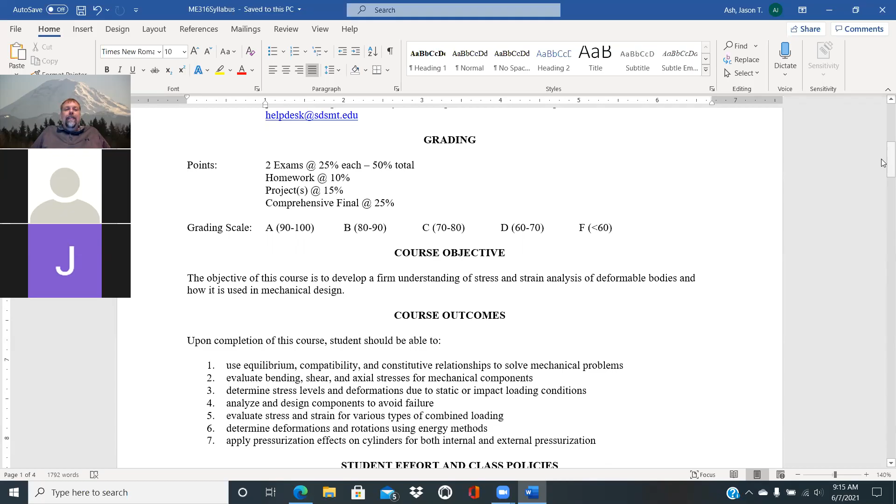And we have the whole list of course outcomes looking at applying equilibrium, compatibility, and constitutive relationships to solve our mechanics type problems. We'll evaluate bending, shear, and axial stress.

Looking at static or impact loading conditions, we might get to that. That shows up in the discussion on energy methods. And so we might have some time to look at that. Looking at failure criteria for that 4th item.

And there's a couple alternatives. We'll probably get into that more as we get to our lecture notes, but there's a couple ways to tackle that concept.

Evaluate stress and strain for various types of loading. Determine deformations and rotations using energy methods. And we'll also look at, in addition, the internal pressure vessels and the combined state of stress caused by internal pressure vessels.

What I found last summer when I was putting the syllabus together is that we cover quite a bit of material in a short time frame. And so in terms of expectations, think about for every 1 hour class period, it's expected that you spend between 2 and 3 hours in reading and solving the homework problems.

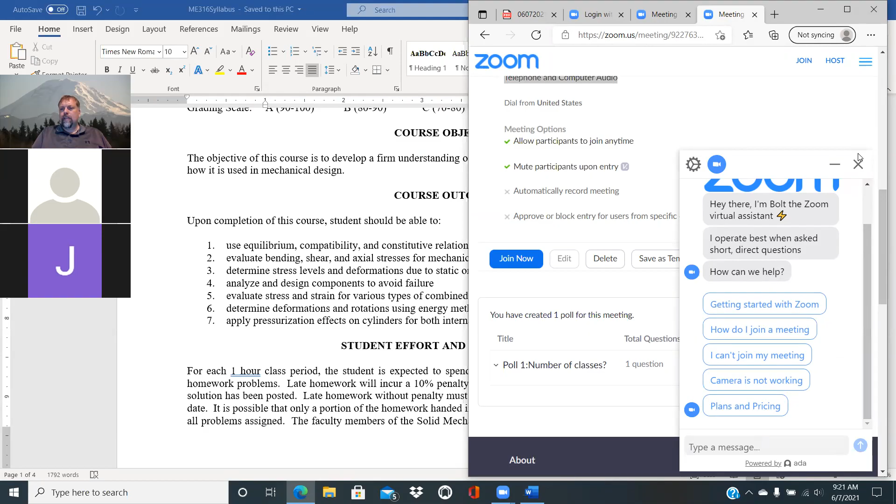I'm not sure if that came up as I was anticipating. I hit the poll button. Did you happen to see that come through? No, I didn't see a thing come through. Okay, no worries. I know how to do the polls in D2L, so I'll just send that and you'll get an email.

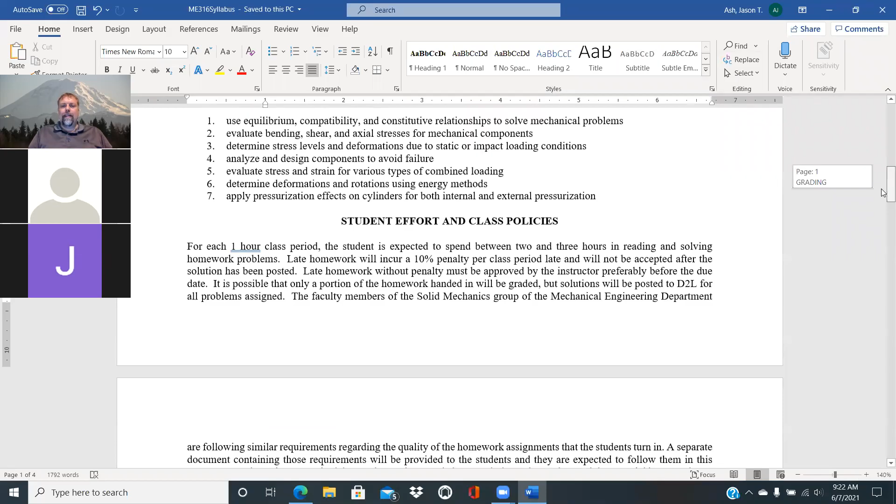We only have probably a fraction of the students on here today, so we'll be able to do that here after class. But I'll just kind of get an idea then from that anonymous poll how many classes each of you are in. And we'll do that through D2L. That'll work out well.

Then there's just all the other stuff on the student effort. For my classes, I have a 10% penalty for each class period that homework is late.

But as I mentioned before, we cover a lot of material here during the summertime, so I would definitely recommend just keeping up with homework and not getting behind, because it would be very difficult to catch up.

And likewise, this will all be done through D2L, and I make the deadlines due at 11:59 p.m. so that you have time in the evening to finish that up if needed.

I said that in the email too, that I normally would make homework due on Fridays at midnight during a normal semester, but last summer we had some students that requested that be moved to Saturday by 11:59 p.m. since they were working all week, and that was totally fine with me. That didn't make any difference.

So keep me posted on that, just with the summer situation, if we're maybe needing to shift the deadline for the class as a whole.

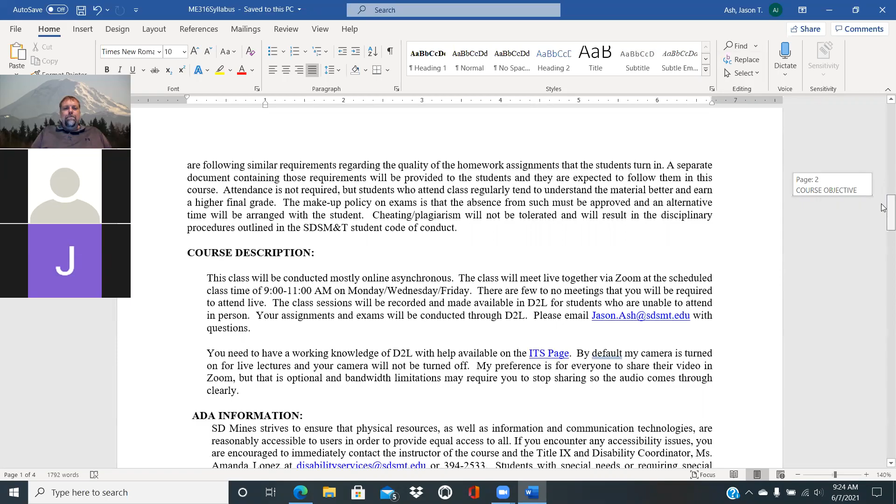Everything that we'll do through Zoom, online, through D2L, again, we're just essentially using the honor system to maintain our academic integrity. I think what I found since we had to switch over to online in March of 2020 is that students have been doing really good with that. I really haven't seen any concerns come up with that at all.

The exams, those are take home as well. And I just have you sign a statement saying you only use the allowed resources within our D2L pages, your textbooks and things like that, and that you're just doing the exams by yourself. So I've been really satisfied with the students and their academic integrity throughout this whole situation.

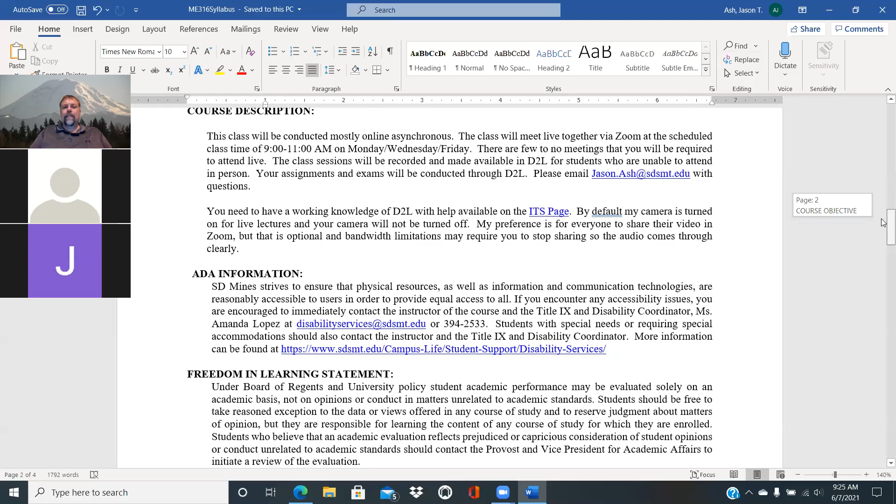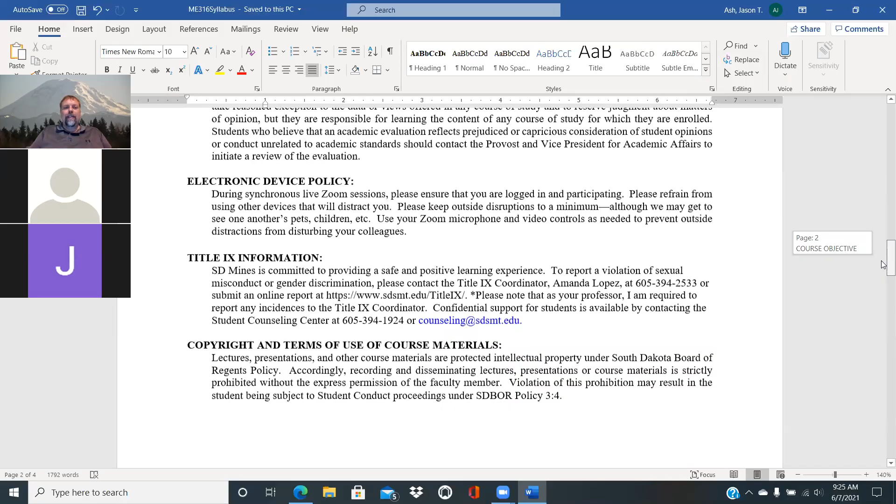And then as we continue through the syllabus, we just have the information on the course being online asynchronous. There's the ADA information, freedom in learning statement that you're probably all aware of, and electronic device policy.

I think the main thing with Zoom is just making sure you have your microphone muted when you're not talking. And then you can either unmute by clicking unmute, or you can hold down the space bar when you have a question.

By default, I have it set up so it doesn't show your video in Zoom, mainly because you might be waking up in the morning and you don't want to share your video and you don't want it to default to that. But if you want to share your video, that's kind of nice to see people when I'm teaching, but that's completely up to you. There's the Title IX information

and the copyright information for the course. So you'll be able to read through all that.

I did keep the COVID-19 information in here, just that they were requiring us to do this past year, but that's something we probably don't have to be concerned with at all here over the summer for an online course. And then thankfully, for those of us that are on campus, May 10th is when the Board of Regents removed the mask policy, so we no longer have to wear masks indoors, which is super exciting.

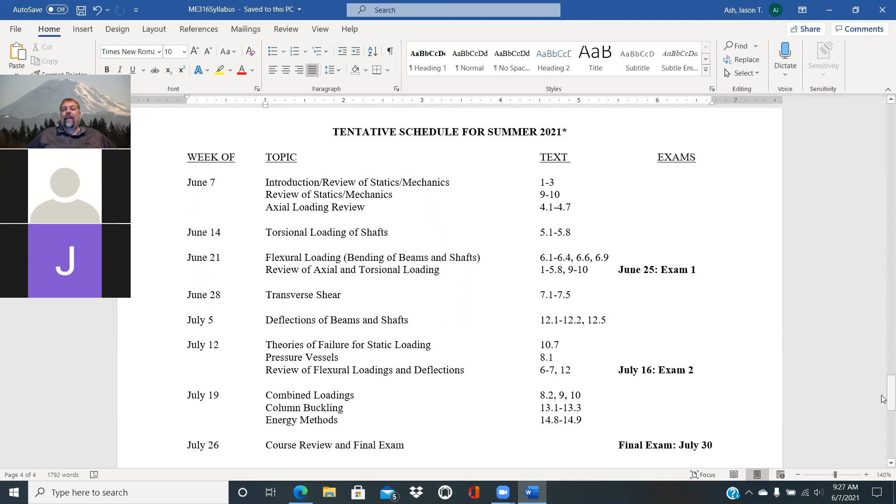The thing that's of more interest is really looking at the schedule for this summer. This is kind of where we get to see that, yeah, it is fairly quick how we go through the course material. So this week, again, we'll just do an introduction review of both statics and the intro to solid mechanics.

We'll continue that looking at chapters 1 through 3 and 9 through 10. And then we'll review axial loading conditions here towards the end of the week.

Next week, we'll cover torsion in about a week. And then we'll get into beam bending following that. And it is just going to kind of depend on how we're moving along when we introduce exam one, and when that'll be due.

And so it'll be around that time frame of June 25th. What I really liked is having that first exam before the 4th of July holiday.

And then following that, we'll finish up beam bending and get into transverse shear stress of beams. Then it works well to go forward a little bit in the textbook and then talk about the deflections of beams and shafts,

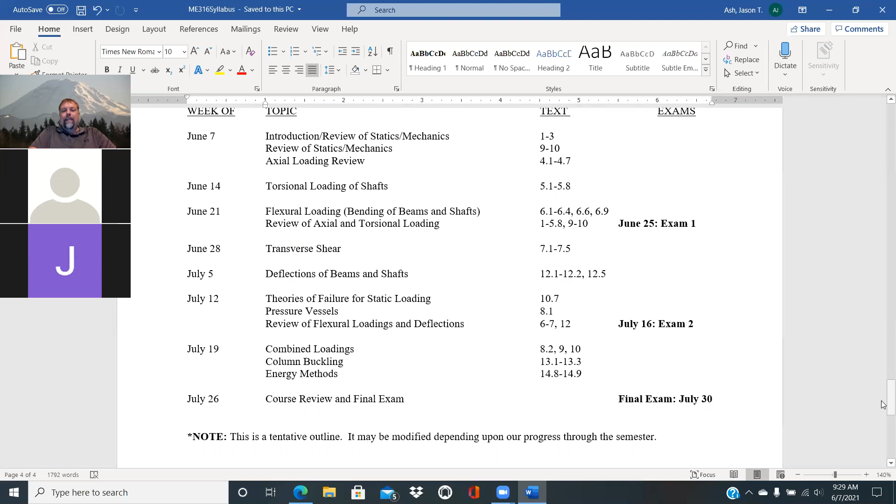And then the final exam will be towards the end of July timeframe. But that's it for our syllabus. Are there any questions at all over the syllabus?

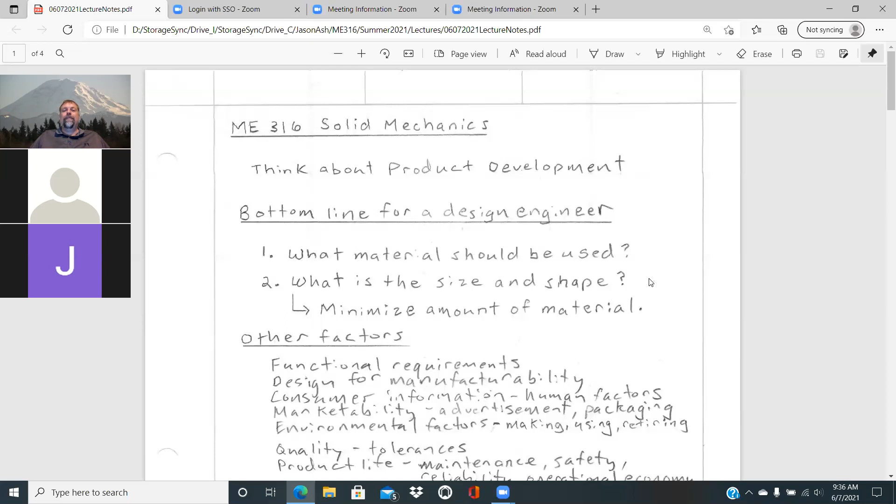That kind of touches nicely on the need to identify the material that should be used for the application. Mechanics is really what helps you define the size and shape. If you have a factor of safety required by design codes, you can use your mechanics analysis to achieve those factors of safety in your design.

But there are a whole host of other factors design engineers need to consider. Again, the functional requirements - what is this system supposed to do? When you design that, the goal is to meet those tasks, those functional requirements.

Additionally, you're looking at designing that in a way that's easy to manufacture. I'm really glad Dr. Lally now teaches his ME 126L, the design for manufacturability course. That way first year students really start thinking about that concept their first year.

If you can make a product that is much easier to manufacture, those costs are going to go down tremendously on the manufacturing end, which helps on the profit end of things.

That's good from an engineering standpoint to realize the insight that can be provided by those in the manufacturing area - machinists and the like - and developing a good rapport with them on designs you are developing. It's always good to run those things by the machinist to get their input, because they definitely have that background and can offer insight into improving the manufacturability of those systems.

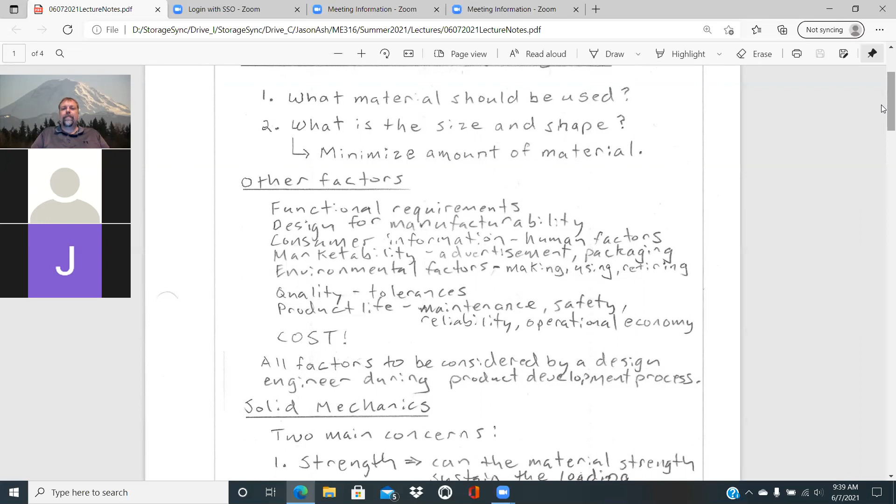Other factors: consumer information, human factors - how are people going to interact with this product, and how can we design that so the interaction is done safely.

For the presses we had at Hutchinson Technology, those were all pneumatically operated by air, and that's really an OSHA requirement. To block the air, you had to use both hands to block the air channels on each side, and that would initiate the press coming downward. They didn't want a situation where you just used one hand to initiate the press - you had to use both hands, so you didn't have a free hand out there getting crushed by a press. The same is true for how people interact with products generally.

Marketability - looking at advertising and packaging. That's really interesting if you're just buying some mundane item like a toaster. If you look at Walmart or Target, you can get an idea of how much effort went into the packaging, showing the details on the outside to make it appealing for the consumer to purchase. So that's taken into consideration.

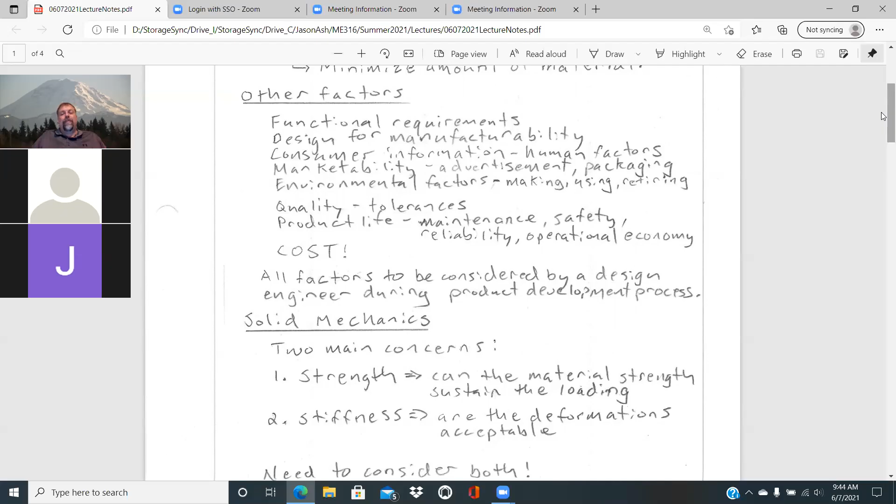But from a design perspective, oftentimes that really comes down to cost. That's really what you're trying to do. And that overall decision-making process is to minimize the cost as much as possible so that you can focus more on the profits that are being made. But those are all factors. There are many more that need to be considered throughout that design process, from a design engineer's perspective, for that product development process.

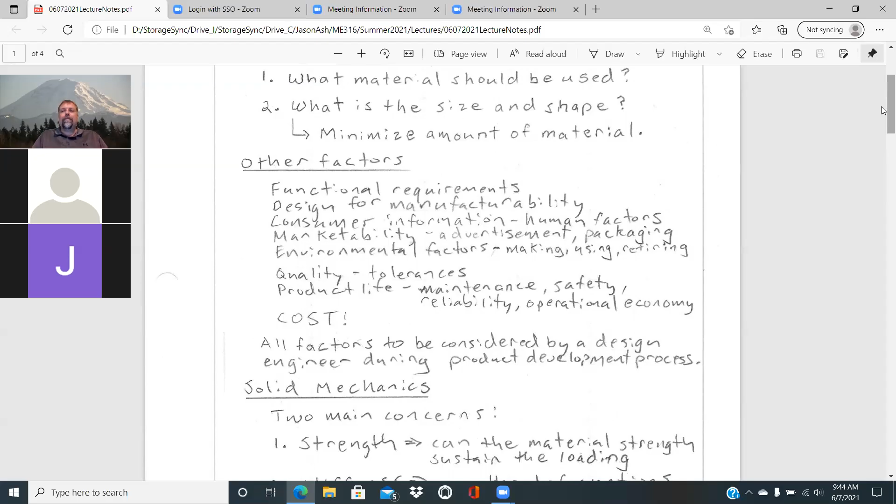But my perspective is it's nice that you're able to see that product development process in ME 265. But now as you're going through all your ME 300 level courses, you're gaining the engineering fundamentals needed to analyze those designs. And it really should be the analysis that ultimately drives that design, so that you have the engineering fundamentals to back up that the product, the system, will operate as intended when it's finished. And that's really the ideal goal of engineering: to be able to utilize the analysis to have confidence that the system is going to be working when finished.

And testing gets placed in there too, because you still need to have that verification that things are behaving as you expected through that design process.

NASA, JPL, they do that with the rovers that they send to Mars. They run them through batteries of tests here on Earth, so that when they send those to Mars, their goal is to have all the kinks worked out, because it's not easy to make any repairs once it's on the surface of Mars. And they have a pretty good track record of making very reliable systems to rove around on Mars.

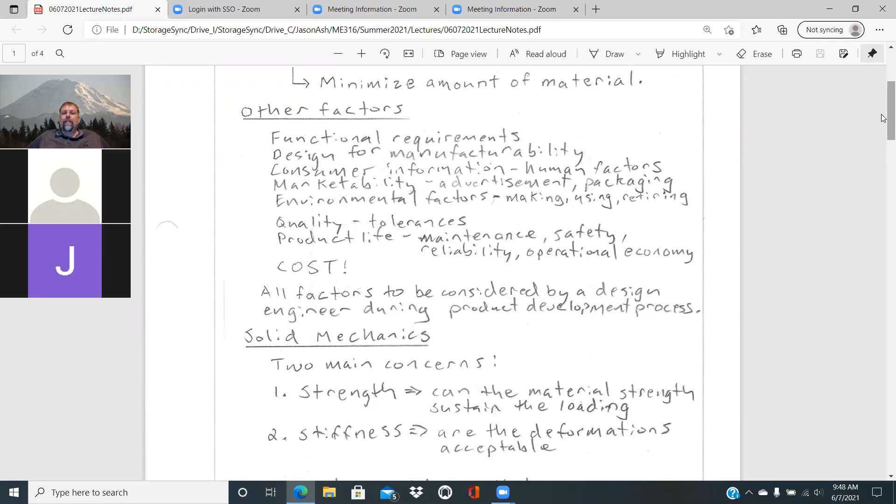From a solid mechanics approach, there are two main concerns we have to deal with. One is strength: can the material strength sustain the loading that's applied to it? And two, stiffness: are the deformations acceptable? You really need to consider both when going through the design process.

For stiffness, for example, if the system or part of that system deflects too far, and it's a moving system, if it deflects too far where it then causes an interference and collision with another component within the system, that's going to lead to a failure. And for strength, if it breaks, it's probably not going to work.

That becomes interesting when you start talking about composite materials, because you can have all sorts of different failures start to occur, like interlaminar failures and other types of failures where it's still together, but things are happening.

One of the funniest definitions I've heard of failure is you can really define failure when you have two pieces instead of one that was intended. So there's discussion in that process, but the question might be how much damage can you have from, say, a composite failure before it's unable to meet its functional requirements.

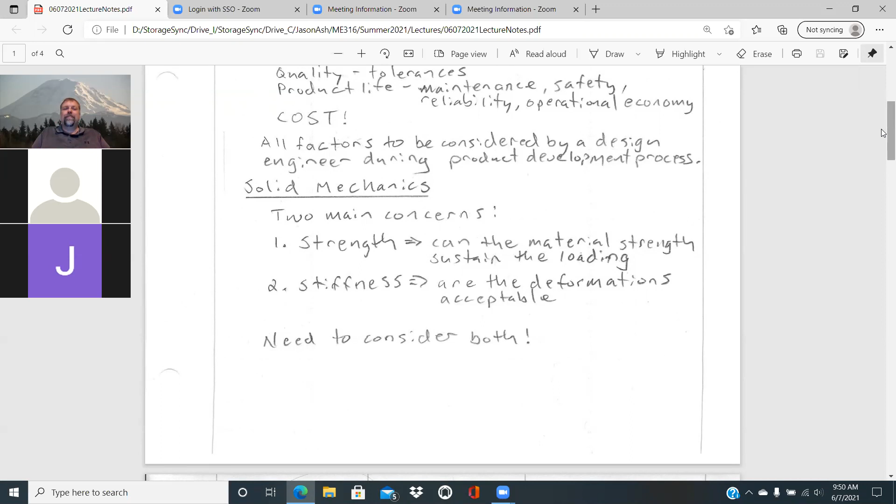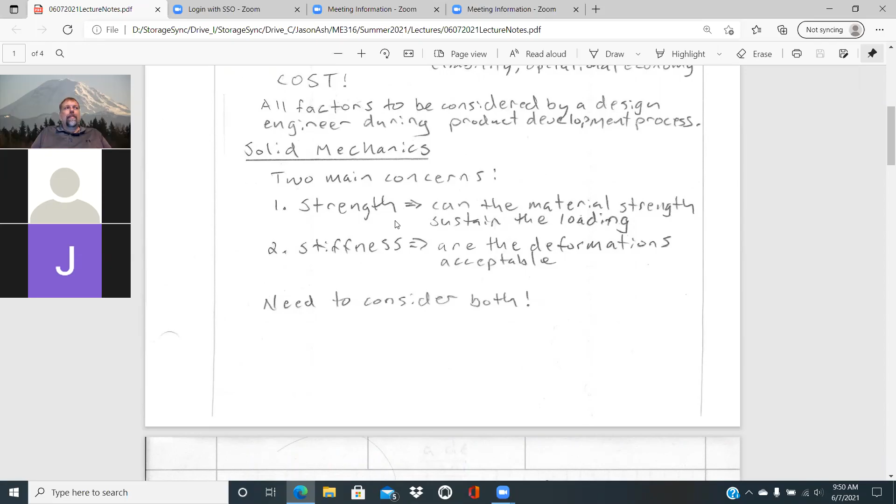Generally these are two separate things that are considered, two different criteria that you have to meet, but there are occasions where you have to kind of look at those simultaneously in that process.

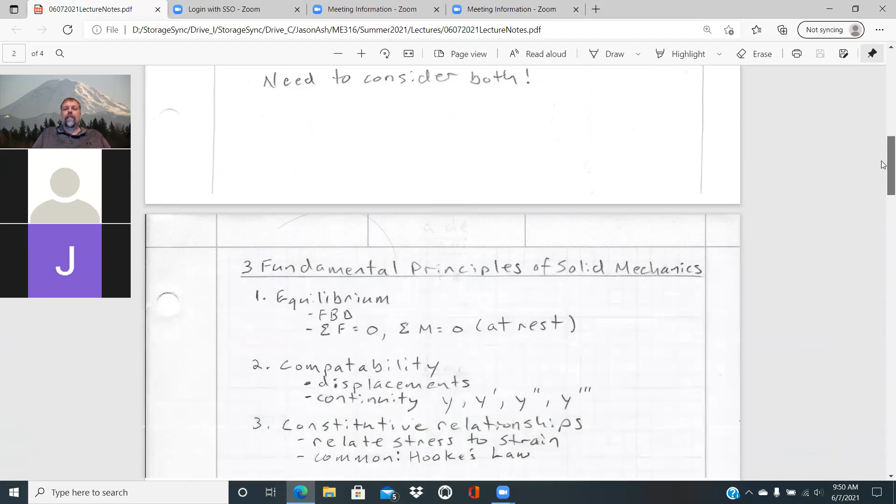Reviewing a bit about the fundamental principles of solid mechanics, we really have three main tools to answer those questions on strength and stiffness. One, we have equilibrium that we've been learning since ME 110, statics, and intro to solid mechanics, where our main tool is the free body diagram, to look at our component or system.

What are the forces acting on it? What are the reactions that are occurring to keep that in place? And doing our summation of forces and moments equal to zero to determine what those internal loadings are. That's for a system at rest.

One of the things you see in your solid mechanics textbook, and then when you get into machine design, a lot of those systems you're going through and designing for are for things at rest. The textbooks really don't focus a lot on looking at systems in motion. We'll talk about that here a little bit towards the end.

Two, there's compatibility. That's where you're starting to look at those statically indeterminate situations where you need to look at the displacements to make sure they're matching up. You're looking at continuity: Y prime would be your slope, Y double prime would be your curvature. Those would also have to match up at a certain point so that those are not violated.

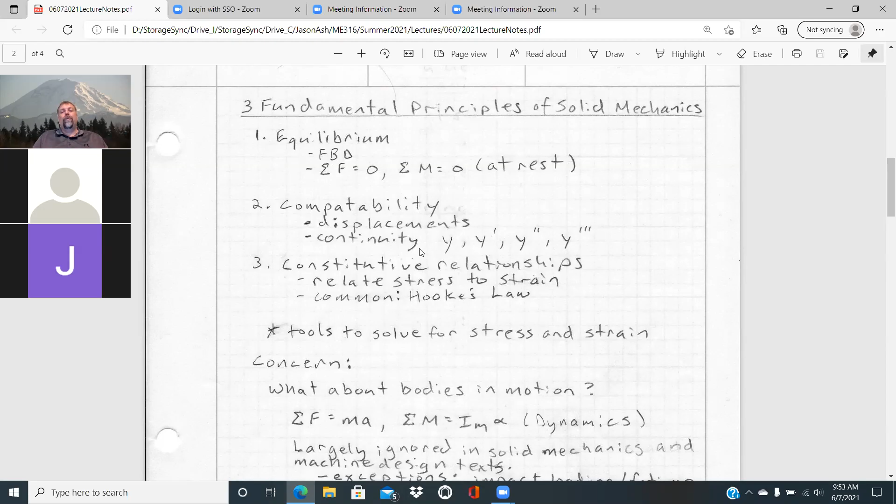But we'll show you the full 3D Hooke's law. That's the one I prefer to remember, because generally when we're looking at solid mechanics stuff, it's a 3D state of stress that we're dealing with. So we need to use 3D Hooke's law to have a valid constitutive relationship for that. All three of these then are tools to solve for stress and strain.

The big concern that I just mentioned is, what about bodies in motion? Again, we learn about this in dynamics, where we have summation of forces equal to mass times acceleration, and summation of moments equal to I of m times alpha.

In dynamics, you might have seen this as I alpha. I do like subscripting that with an m to really designate that as the mass moment of inertia, which is a body's resistance to a change in angular motion. We use an I value in our ME 316 solid mechanics course, which is area moment of inertia, and that's more of a resistance to bending.

I like this M designation here for bodies in motion, so it doesn't cause confusion with our I value that we use frequently here in solid mechanics for the area moment of inertia.

But again, this dynamic stuff is largely ignored in solid mechanics and also in machine design texts. They do touch on that a little bit with impact loading, which really just involves looking at kinetic and potential energy in that process and identifying a kind of impact factor to look at a quasi-static approach to solving those problems. Then fatigue looks at cyclic loading, but that's still not bringing in the dynamics of the situation—it's just looking at how many cycles that's going through.

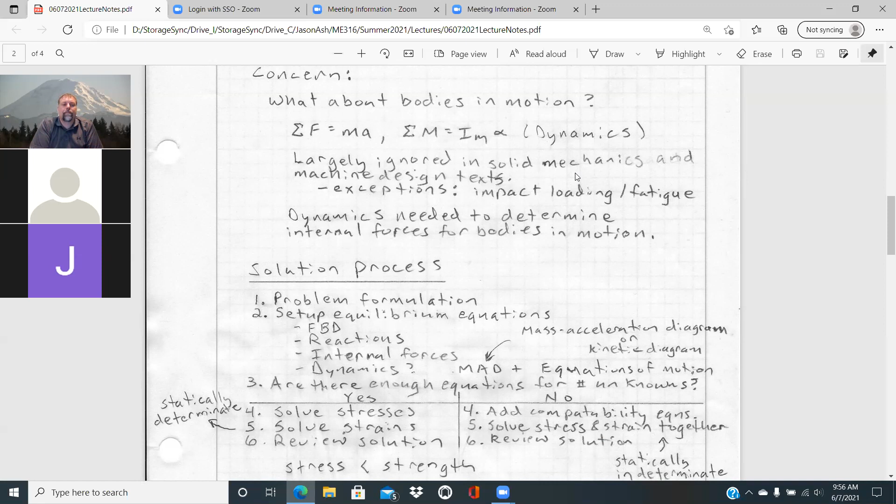Another helpful thing from a dynamic situation is if you look at mechanical vibrations, one of the electives you could take as a senior. That starts to look more at these dynamic effects, and instead of just doing a quasi-static look at potential and kinetic energies, vibrations takes you more through the system of equations, solving those from a differential equations perspective to determine the response of the system from a dynamic loading situation. There, you'll be able to see the maximum forces experienced during those dynamic loading situations.

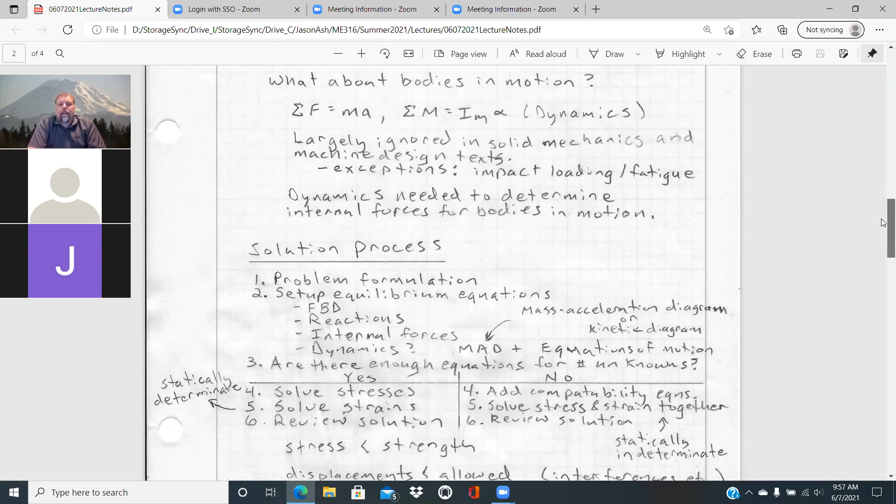Let's talk about the solution process you go through when solving these types of equations or problems involving mechanics. The first step is always problem formulation, where you identify what is known for the problem, what is given, and what you're wanting to find. Given, find—you want to define those clearly so you know what you're trying to solve.

Those are laid out nicely in the problems in the textbook. But if you're solving a problem on your internship or co-op, you don't have a nice, neat problem statement to work from. So you're doing those steps yourself, looking at what you're trying to accomplish with the design, what are some known factors, what are some known specifications you need to meet, and then again what you're trying to resolve in this process.

Once you have that, you can start making use of your analysis tools. The first thing you generally do is set up your equilibrium equations by drawing your free body diagram, FBD. You look at the reaction forces for that system free body diagram—can you identify what the reaction forces are based on that? If so, you're set and can solve those. Then you can draw additional free body diagrams of specific components and determine what the internal forces are.

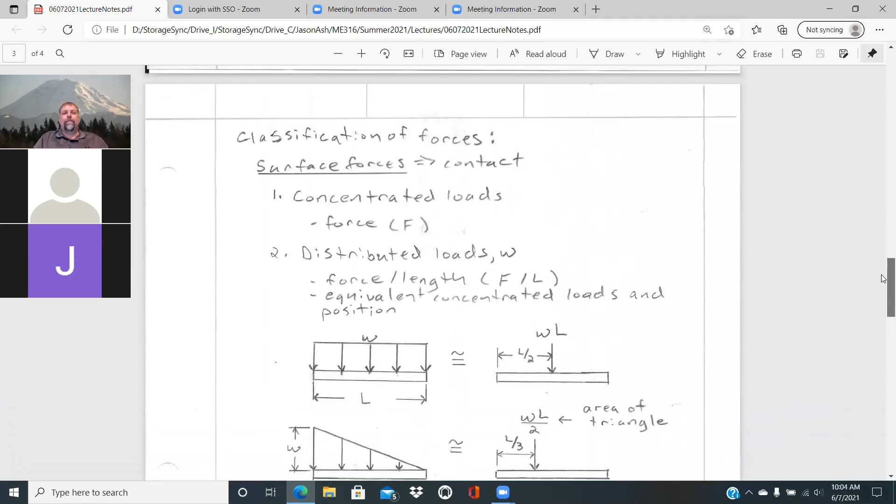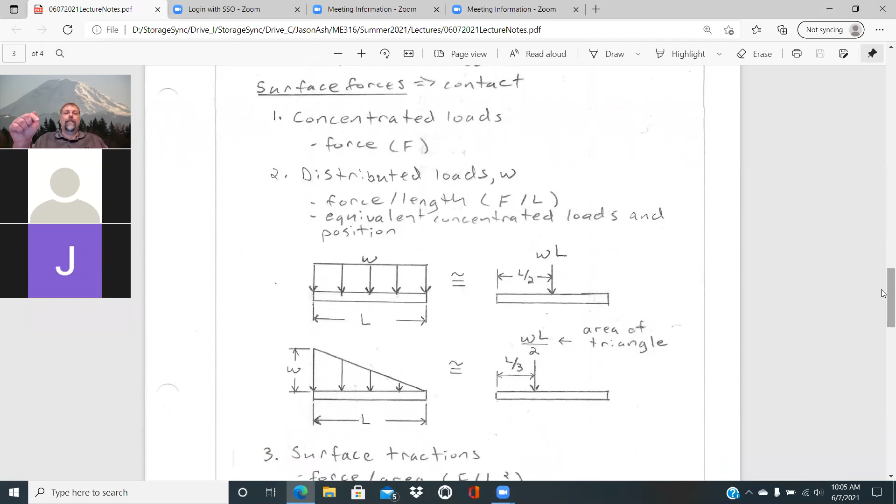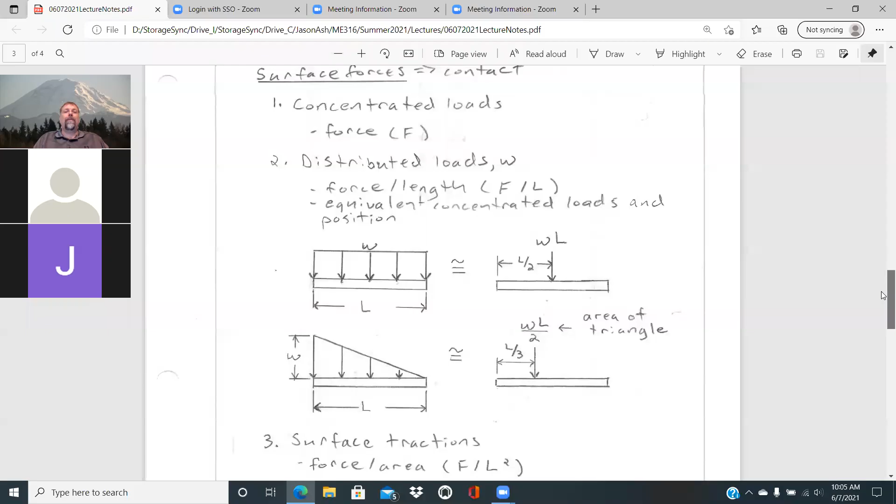Looking at classification of forces, there are things grouped into what are called surface forces or contact type forces. One is a concentrated load, just a force acting at a point. It's going to have units of newtons if you're in the SI system, or pounds if you're in the US system.

Distributed loads are defined as W, which is a force per unit length. What's oftentimes helpful is when you're drawing your overall free body diagram to figure out reaction forces, you can find an equivalent concentrated load. If you have a uniform distributed load over a given length, the equivalent concentrated load would be that distributed load times the length, located halfway along the length of the beam, since it's evenly distributed. That works to find your reaction forces. But when you want to find your internal loadings, you do have to draw a free body diagram of just that portion, including the distributed load over that portion. At the same time, you can do that same trick and figure out an equivalent concentrated force, but just over that small section. We'll go into detail on that when we get into beams, but we do need to typically find these equivalent concentrated loads in terms of solving problems.

Other situations you might have are, say, a triangularly distributed load, where the loading decreases with respect to length in a triangular fashion. We have the maximum load per unit length at the far left, W, and that decays down to 0 at the far end. This is common, say, for hydrostatic type loading in a fluid.

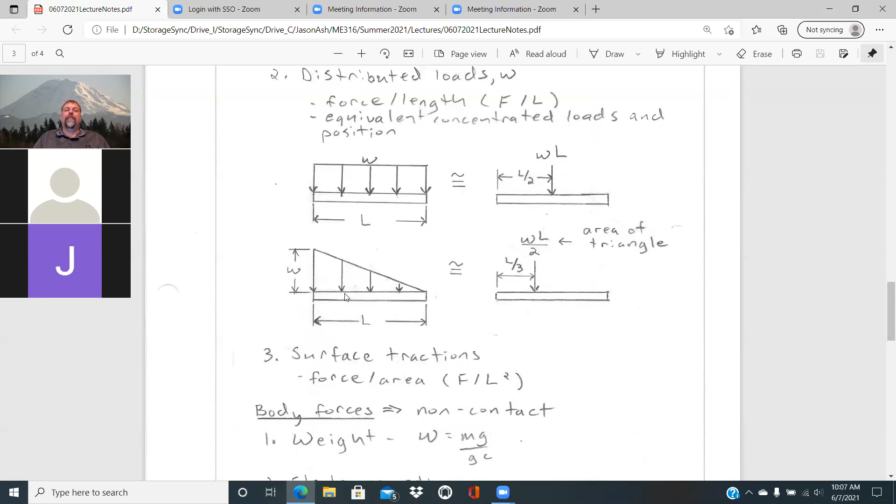The equivalent concentrated load is really just this area of the triangle, so W times L over 2. You can see that's the same as before, just the area generated, W times L. But for this case, the equilibrium point is a third of the distance over from the heavily loaded side. What that means is if you were to sum moments about L over 3, you would be within equilibrium at that L over 3 point. Summation of moments would be equal to 0 there at that point for that loading distribution. So there's distributed load, and then there's surface tractions, which is a force per unit area.

The easiest way to think about surface tractions is if you've done tensile testing where you're gripping a sample and pulling on it. Wedge grips are nice in that as they're extending and placing more force, it causes more pressure to be placed on the sample itself. That pressure times the area gives you the force, and that vertical force times the frictional coefficient gives the net force acting upward. It's a force per unit area causing that pressure with the surface, developing a surface traction.

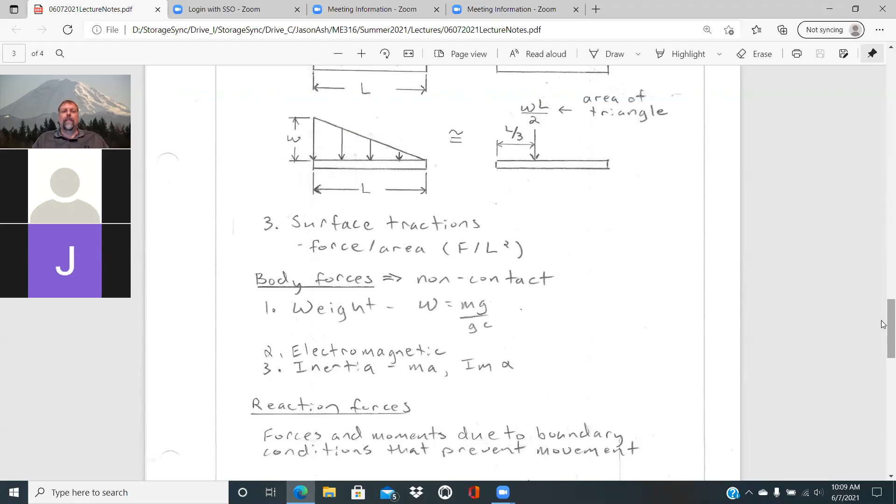Those are all contact forces. Then there's non-contact forces named body forces. Weight is a good example of that, and that's something I cover in ME 110. Weight is equal to mass times gravity divided by G sub C, that dimensional constant.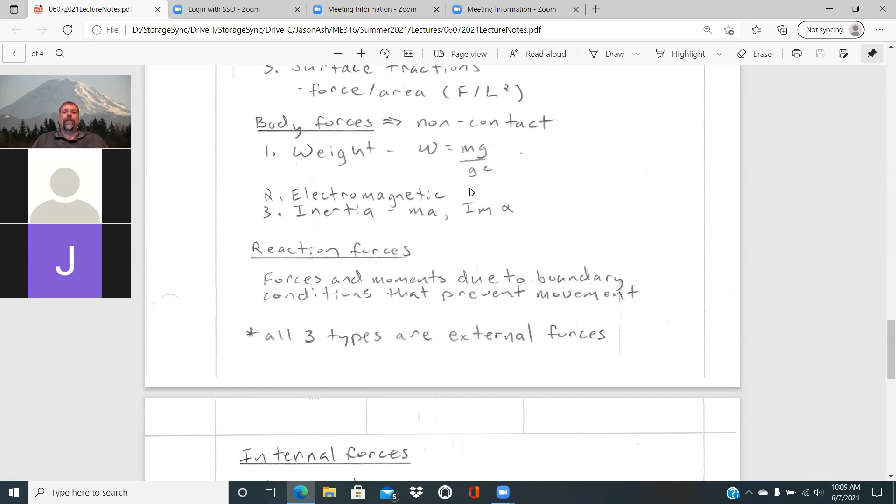Now in these courses, you start to see that in fluid mechanics when you're talking about mass flow rates and things like that. If you come across those situations, make sure to take into account G sub C. If they give you a mass flow rate of, say, a pound mass per second type deal, you'd have to divide through by G sub C to get that into a force if you're doing force type equations. Let me know if you ever need any refreshers on that. Really anytime you're dealing with a mass, mass flow rate, or mass density, you need to take into account G sub C when dealing with the US system.

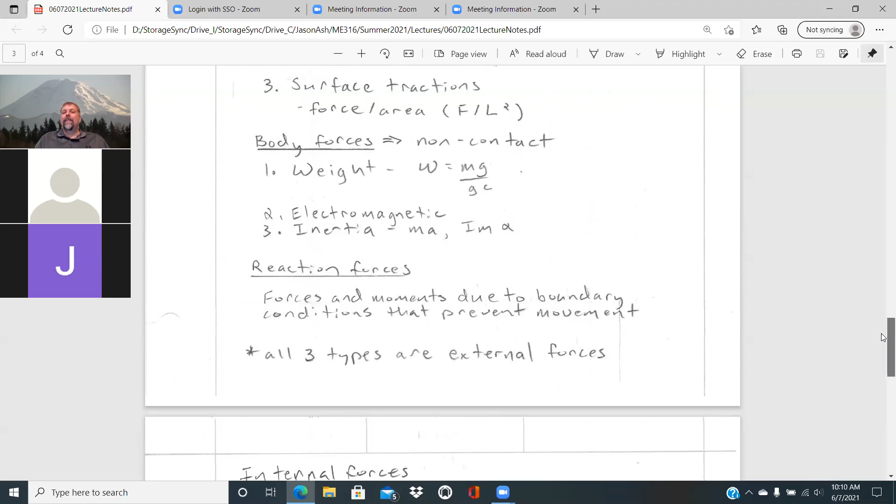I think I was teaching solid mechanics one semester about half a decade ago, and students just came from a fluid mechanics test. They said, 'I remember you talked about units back in ME 110, and we just had a fluid mechanics test. Most of our homework was SI units, so we didn't have to worry about it, but our exam had US units,' and they asked about that dimensional constant, if they did that right.

There's other forms of body forces - electromagnetic. Inertia can be considered in with that, with mass times acceleration, and the rotational I of m times alpha.

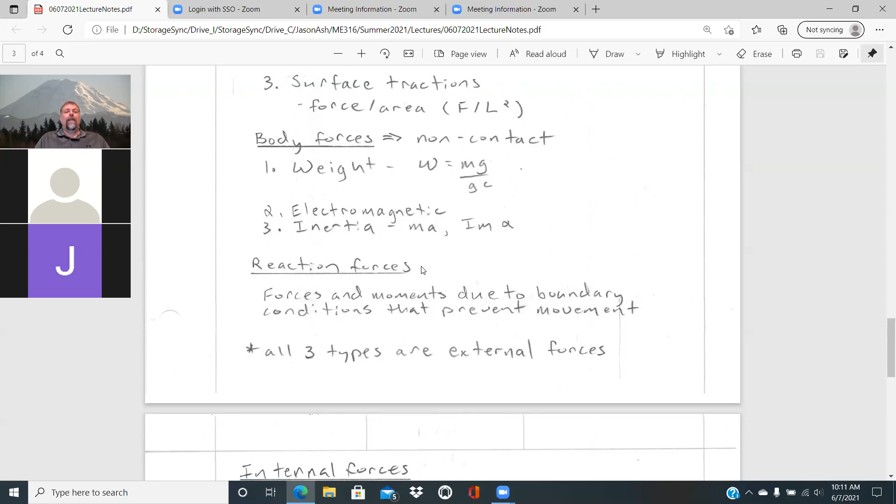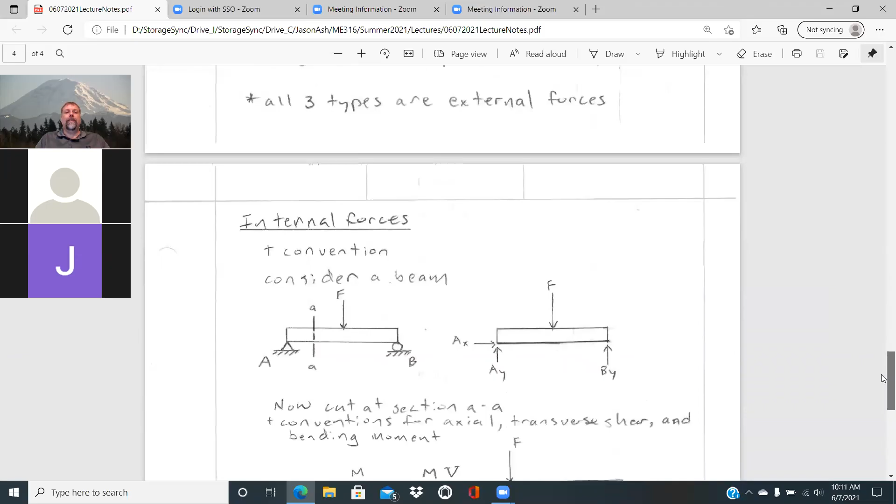Next up are the reaction forces. These are the forces and moments due to boundary conditions that prevent movement, which is something you looked at last year as well. Really, all three of those are considered external forces - contact type forces, non-contact, and reaction forces. And then you have your internal forces, the loading that happens within the members.

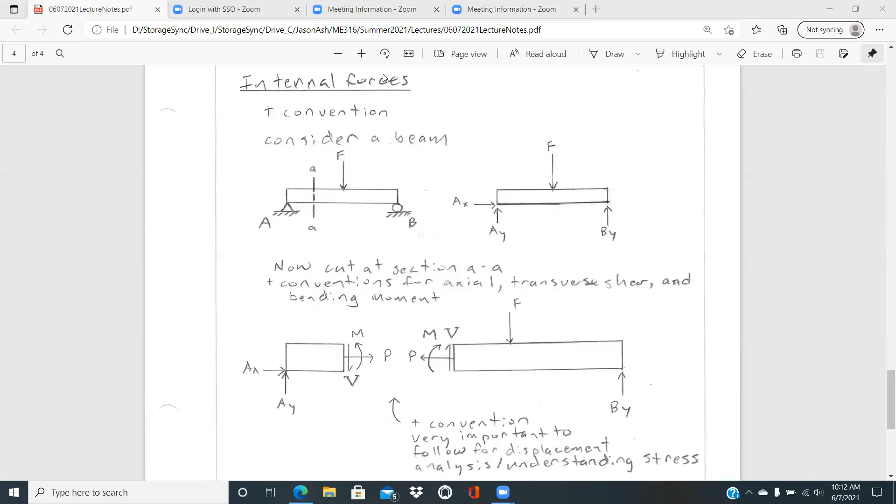Sorry about that. I think everybody's here. All right, it hasn't been 5 minutes yet, so did you want to mark yes if you're ready to finish up here? Or some of you might have taken a break, so I'll just make sure everybody's back before we continue on. The dogs were barking pretty crazy, so I wanted to see if they needed any help, but all was good. I think me coming upstairs helped calm the dogs down a little bit, so that was good.

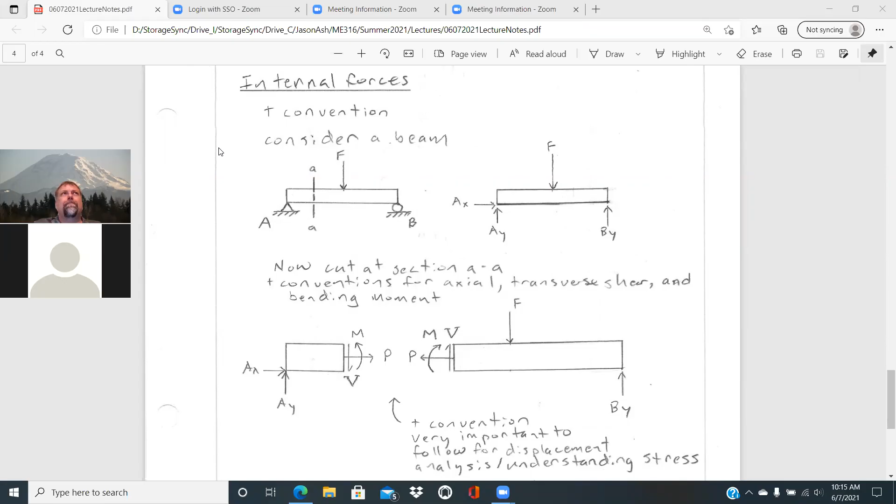All right, so I think we'll go ahead and finish up here. Where we're at, we're just discussing the internal forces and the positive convention of those internal forces, say, within a beam. This is something you'll find in your Hibbeler book, the convention that they use, but it really helps maintain that correct sign in calculating deflections.

If we consider a beam, for example, this would be a simply supported beam with a pin on the left at point A and a roller on the bottom at point B with a force in the middle. Remember, for pin type reactions, it can support both the force in the X and the Y direction, whereas a roller can only support a force in the Y direction.

One interesting thing about your Hibbeler textbook is that they don't give any stipulation on which direction that vertical force has to act. From a physical standpoint, a roller could only provide a force in one direction - if it's not secured, it wouldn't be able to provide a downward force. But I think Hibbeler has the mindset that you could put the roller on top if needed, if the forces were such that it was going to deflect upwards. So the main thing to be aware of is that a roller can provide any type of vertical force, whether upward or downward, but from a realistic standpoint, take that into consideration.

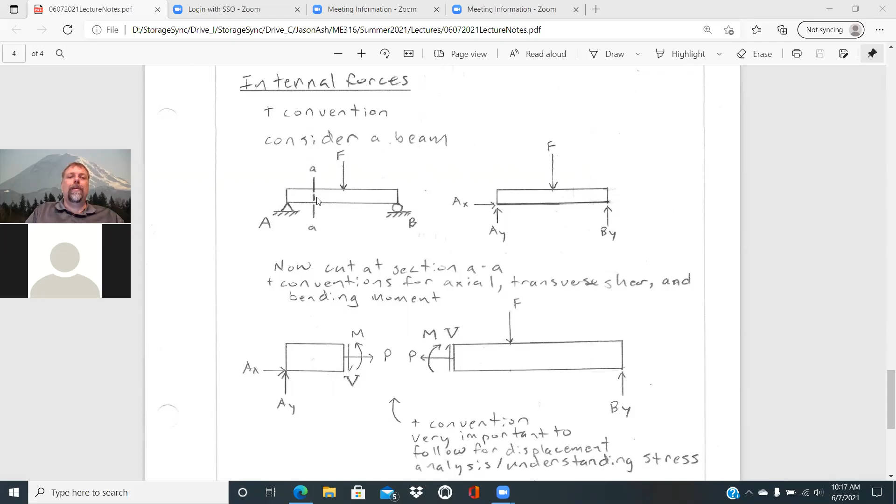When we start doing a free body diagram and cut into that beam to look at a section, we need to identify the proper notation for the internal shear, bending moment, and internal load. So we have A of X and A of Y, which are still reaction forces that could be supported by the pin loading condition.

For the internal positive convention on the right side of a cut, a positive shear force acts downward, and a positive moment acts counterclockwise. Axial loading is always positive away from the cut.

If we look at the left side of a cut, by Newton's third law, every action has an equal and opposite reaction. So those internal forces act in the opposite direction: shear upward, moment clockwise, and a normal force P acting to the left.

It depends on the textbook you're using. Sometimes they'll use a P to define this axial load, other times a capital N to define the normal force. It's just a matter of the notation your textbook uses.

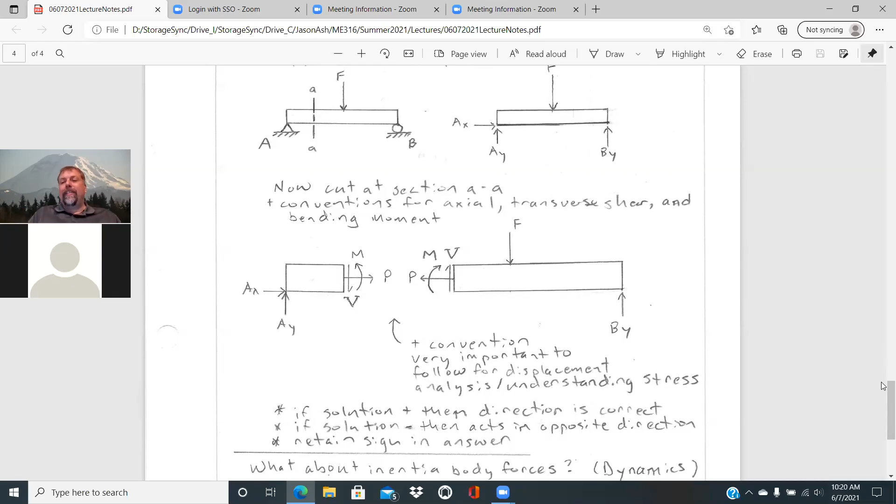The positive convention is very important to follow, especially when you start looking at displacement analysis and understanding stress, as you get into chapter 12 on displacements of beams and into energy methods. If you don't draw your free body diagram correctly for your internal forces, that can lead you to the wrong magnitude when solving for that.

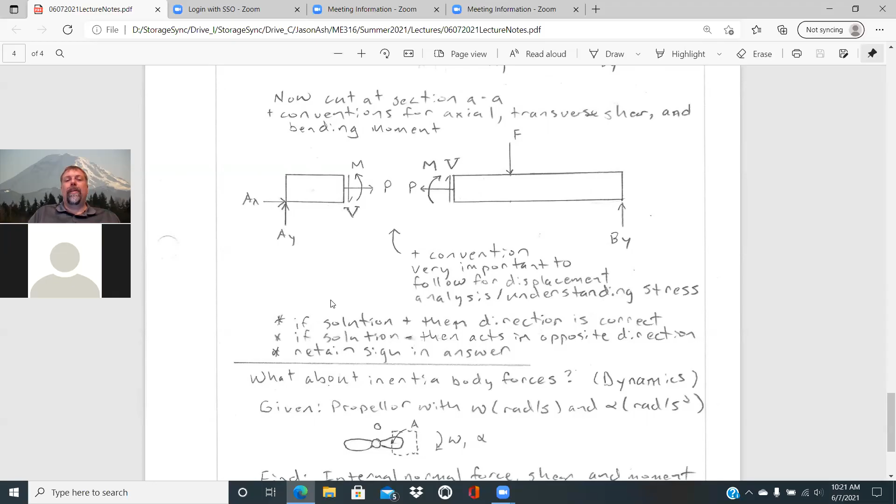If the solution is positive, then the direction is correct as indicated. If the solution is negative, then it acts in the opposite direction, but that's okay. You want to retain the sign in your answer and your solution process for the resulting displacements to come out correctly.

The last bit of discussion is about inertia body forces when looking at dynamics. I've given an example to help you make that connection between what you've learned in dynamics, ME 221, and what we're learning on this mechanics track, just to show how you'd set up a problem associated with that.

If you're given a propeller with an angular velocity omega in radians per second, and alpha, angular acceleration in radians per second squared, say the propeller is spinning around, we can still make a free body diagram and mass acceleration diagram of, say, the right-hand side of this, following the convention we've defined.

On the left side of the cut, P would be acting to the left. We'd have a clockwise moment, shear acting vertically upward, and the weight acting down at that section as well. I have the tangential and normal directions defined in relation to that portion of the propeller blade. For the mass acceleration diagram, or kinetic diagram, you'd have your mass times normal acceleration and your mass times tangential acceleration.

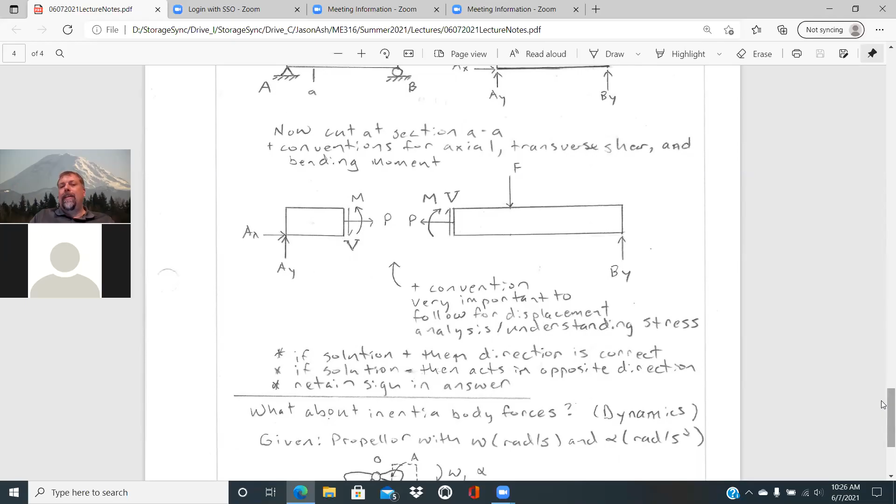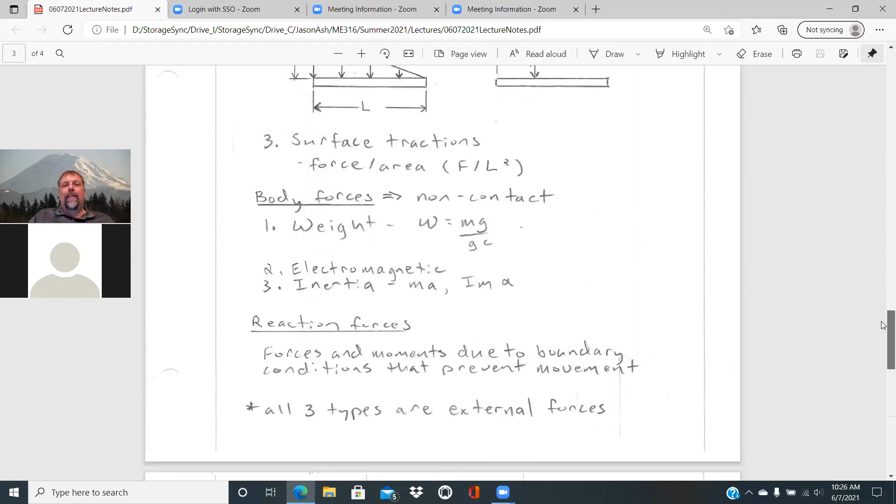Another thing I mentioned is W being the displacement in the Z direction. That starts to show up when you deal with plates and shells. But we find another complication in that W is also used to define the distributed load. For our course, we're not dealing with plates and shells at all, so anytime we refer to a W, it's going to be in regard to distributed load.

But the first time I was dealing with plates and shells, and I was looking at Roark's formulas for stress and strain, they were defining a W in an equation, and I thought, this does not have any relationship to a distributed load, what are they doing? It took me about 10 minutes to realize they were just talking about the displacement in the Z direction. I was like, okay, that's a little confusing.

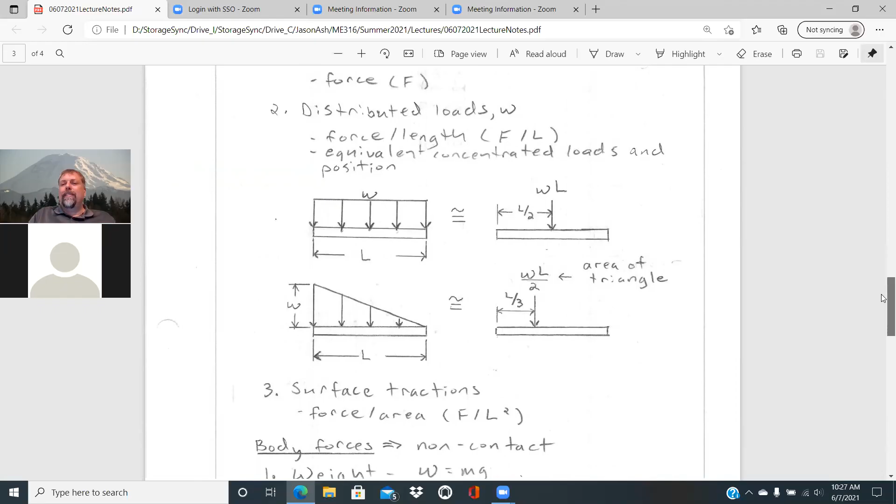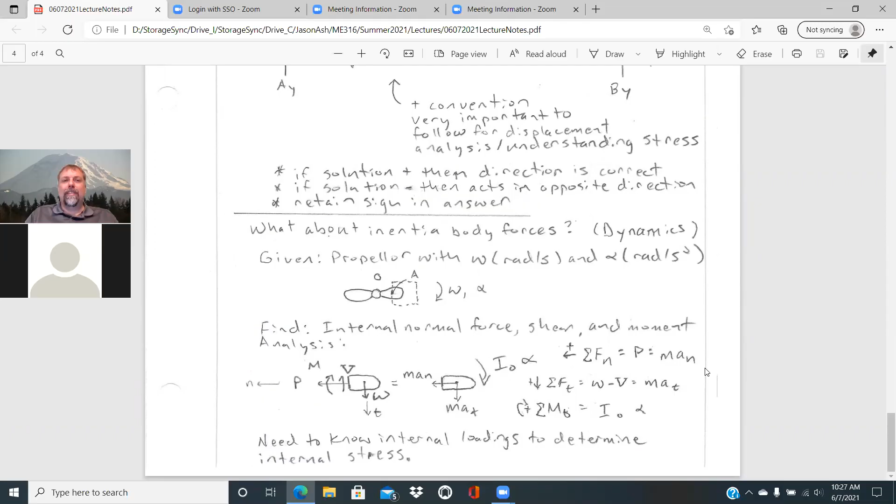So be aware of that as well. I think there's another spot later in the semester where I bring that up. But that was a little longer than I had intended for our first day, and we did make it through those lecture notes. I'll go ahead and stop sharing that.